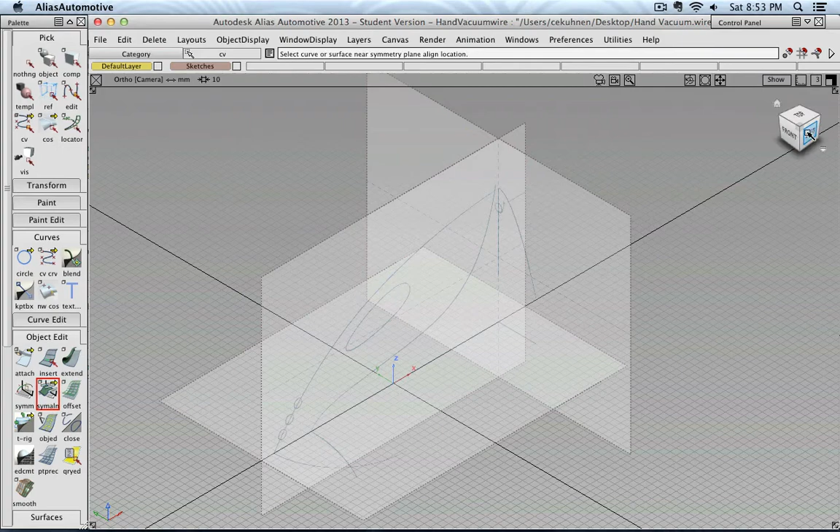So let's get started. What we do first is, for example, in side view, sketch the upper profile curve. So I go to curves, and with my Alt key, I press and create my first point. Make a second one, third, and maybe here I position my last point. Then I can go into the CV mode and into move mode and move it slightly down.

This point, for example, I move with the middle mouse button a little bit to the right. And then those 2 points I reposition freely with my left mouse button. Okay, so that looks quite good.

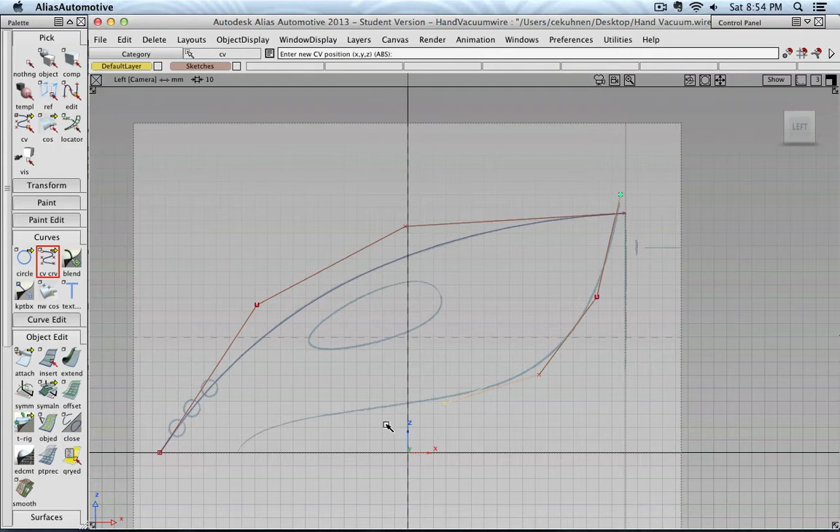Now I can create the inner curve, and I can, for example, maybe start here, and then I have to guess a little bit now how many points I might need to draw this profile curve. And then here to make sure that this point is at the same height as this point, temporarily I'm going to make use of my snapping to the grid with the Alt key, and then I go to the move mode and reposition those points.

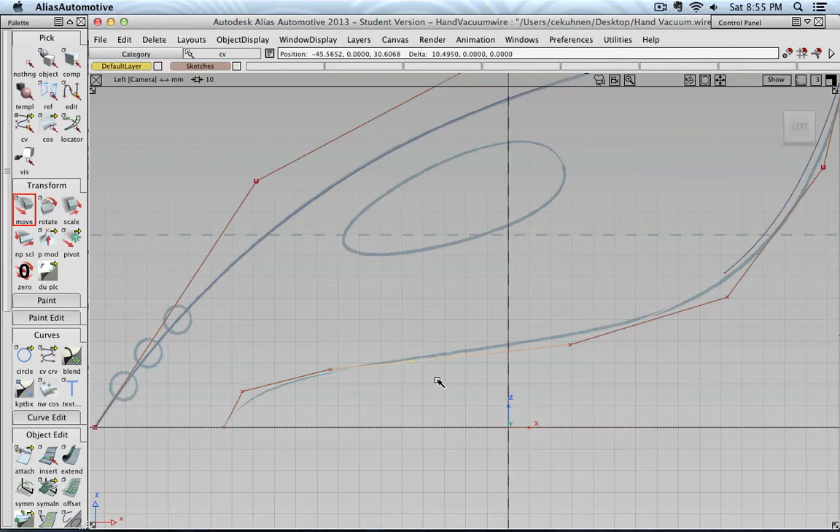And as it looks like, I might have 1 or 2 points maybe too much. Maybe this one I could remove. So I select a point and press the delete key. Then the curve gets simplified a little bit. And that's pretty much what I'm looking for. So a little bit more tweaking. And this also seems to be a good set.

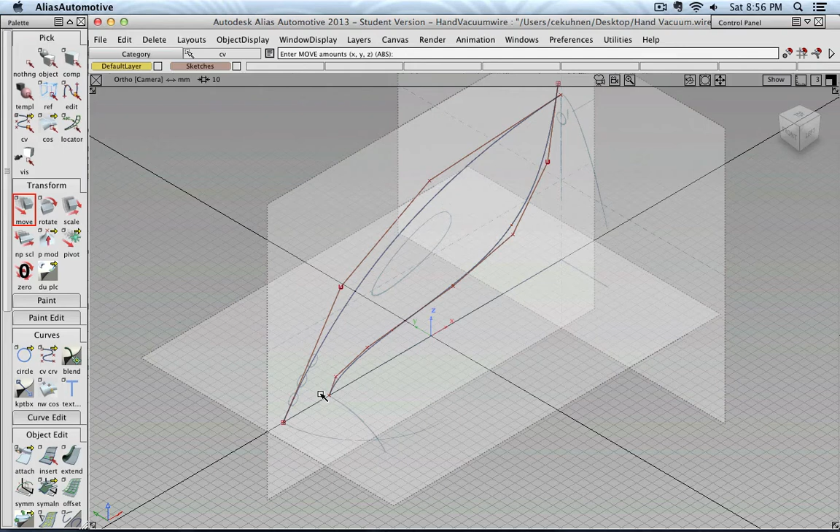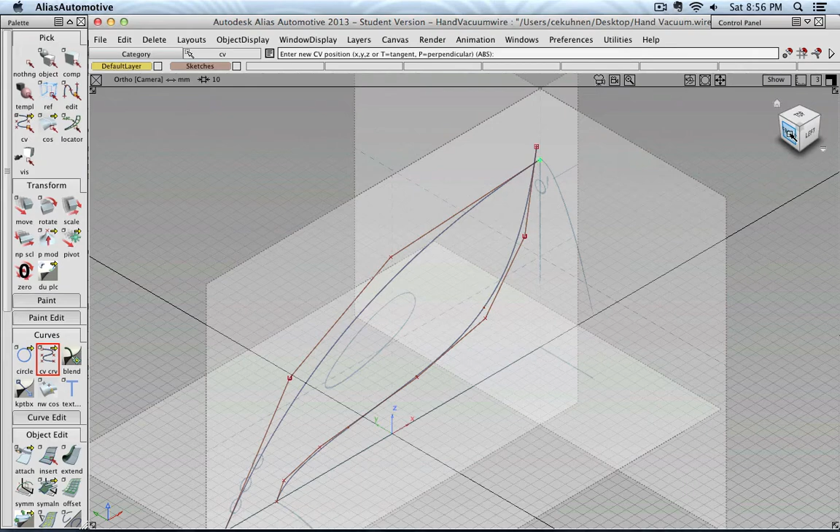Okay, so now it's time to create, for example, this vertical curve and those 2 arcs that are on the horizontal plane. And I can again start with my CV curve. Let's say I start up here. Then I can press the Control key or click on the point snap. Make my first point snap to the end of that curve. Could go into the front view and then press my middle mouse button and drag a point out, and then maybe with 1 or 2 points finish this curve.

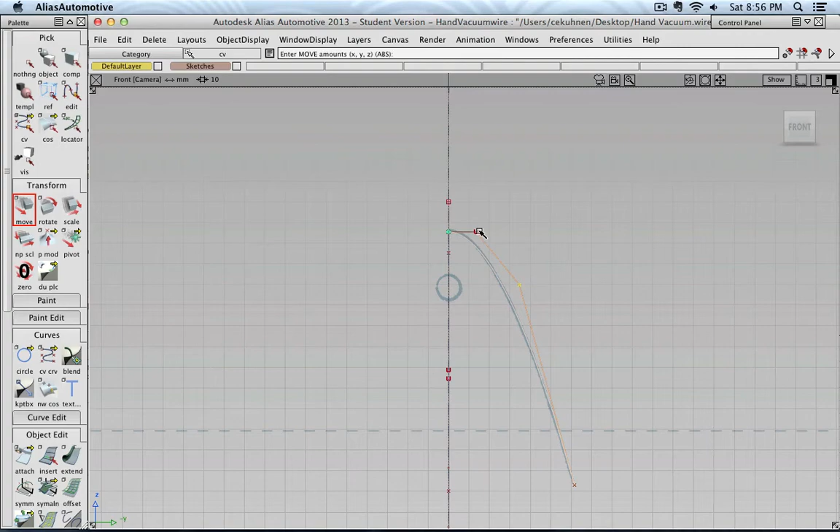I need to do a little bit of adjustment, and middle mouse button here as well, because I would like to make sure that this point and this point will remain perfectly horizontal, so that this curve, when we mirror it over, flows nicely into the left side, so we do not get a kink. So it's again the tangency that's important for the surface curvature.

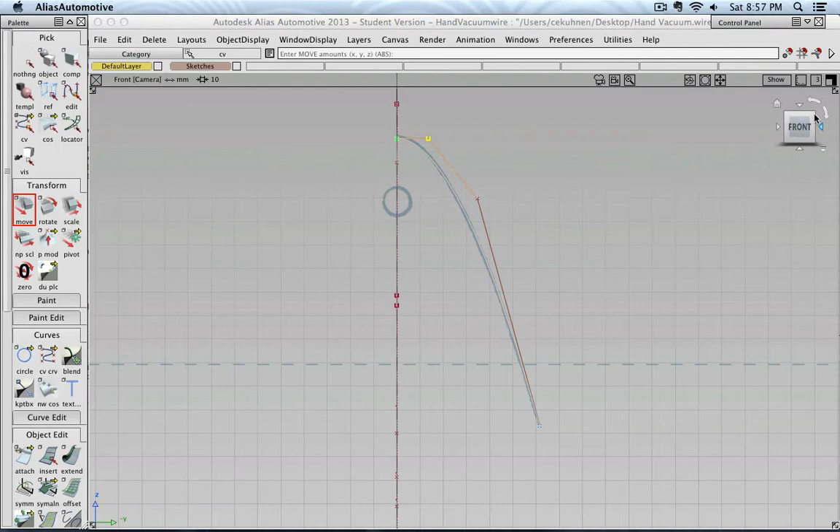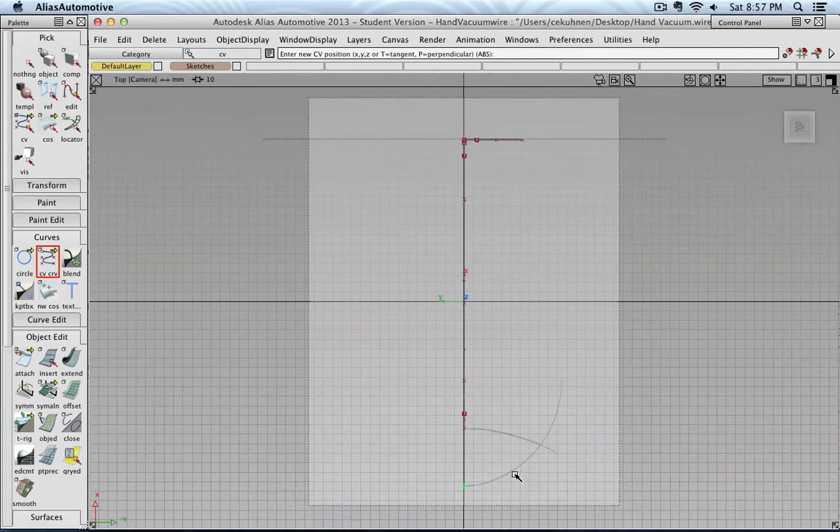Now let's do the same with the 2 curves here, but this time I show you a different approach, and I'm going to place my point here again, pressing the Control key. Then I can go into top view, and I'm just clicking those points first. And before I do anything else, I'm going to use an align tool for the symmetry to make sure that the beginning of this curve to this axis will be symmetrical.

So what does that mean? Let's go into top view so you can see what will happen. Pay attention to where all those points are. If you go to Object Edit and select the symmetry plane align, then it asks you to select a curve or surface near a symmetry plane. So this thicker line, that is basically a symmetry plane. So then I can click close on this curve that is close to the symmetry plane.

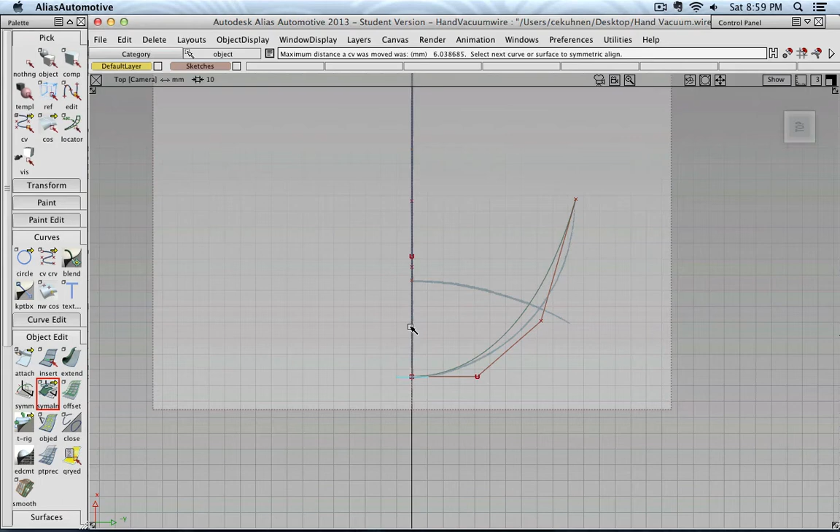When I click, you see that this point was pushed down. Now this point is parallel or tangent basically to this point, and those 2 points are tangent to this construction plane. The nice part is I could, for example, select this point, then I go into move mode and maybe change my curvature a little bit.

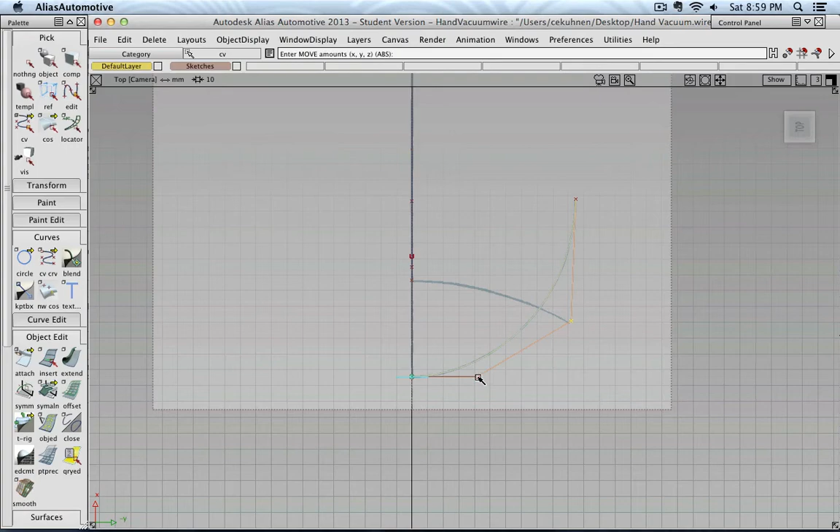And when I select maybe this point, and now I, for example, move it along the x-axis down, you will see that the other point snaps with it. So the align command makes sure that the second point after the first point will always be aligned perpendicular to the construction plane, so that the curve that's created will be perpendicular to the construction plane, and then when it flows into the other curve, the connection will be tangent.

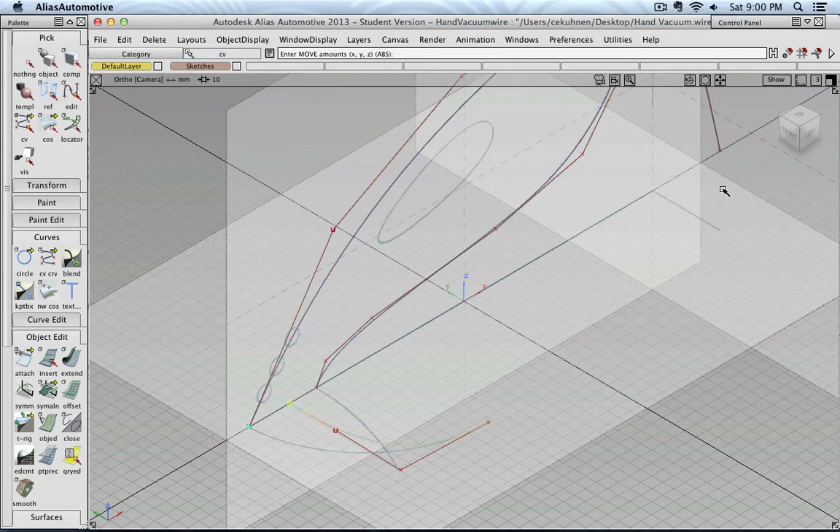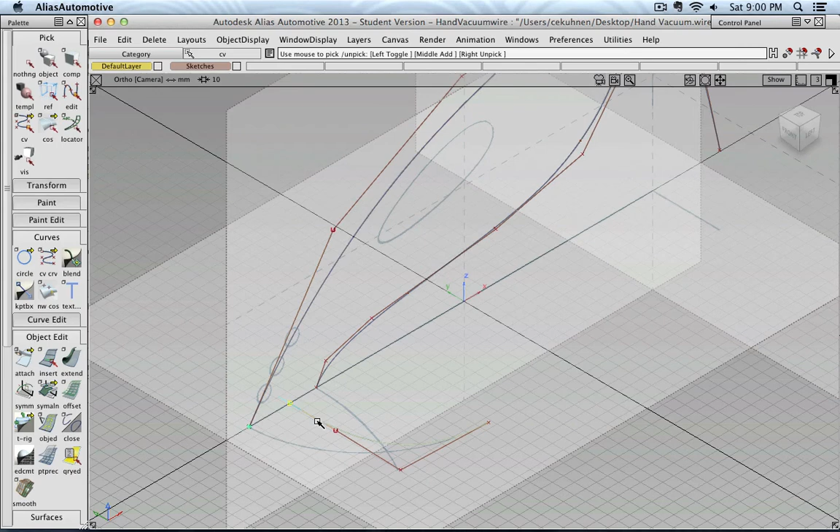Now this curve point I have to push back, so I could press Ctrl, click on this point, or not. Sometimes Alias is a little bit funky there. Let's do this again. Okay, other way. I turn on the snap and then press there. So what's Alias doing right now? Let's turn this off. Okay, now let's press the move command. Oh, that was the wrong one. Okay, and now press Ctrl, and there it snapped. Okay.

So it was important that you go to the move command, and then maybe with the left, right, or middle mouse button you restrict the direction, and then you press the snap key, because otherwise Alias, as you can see, gets a little bit confused.

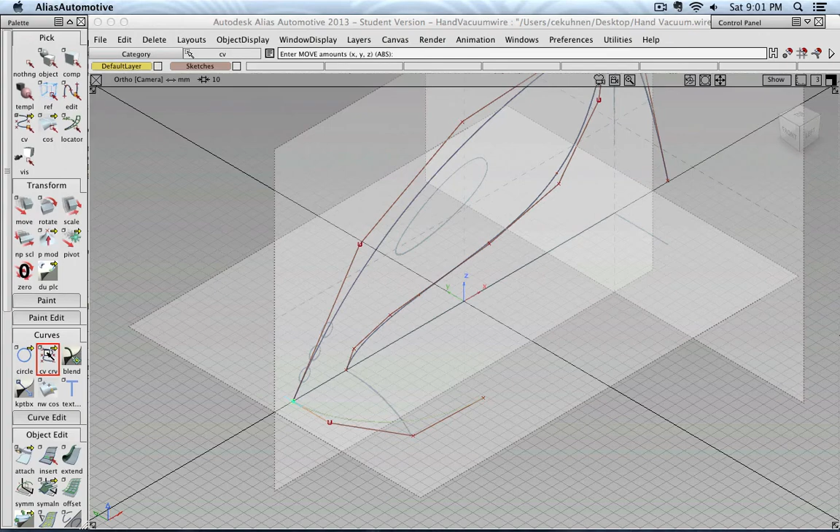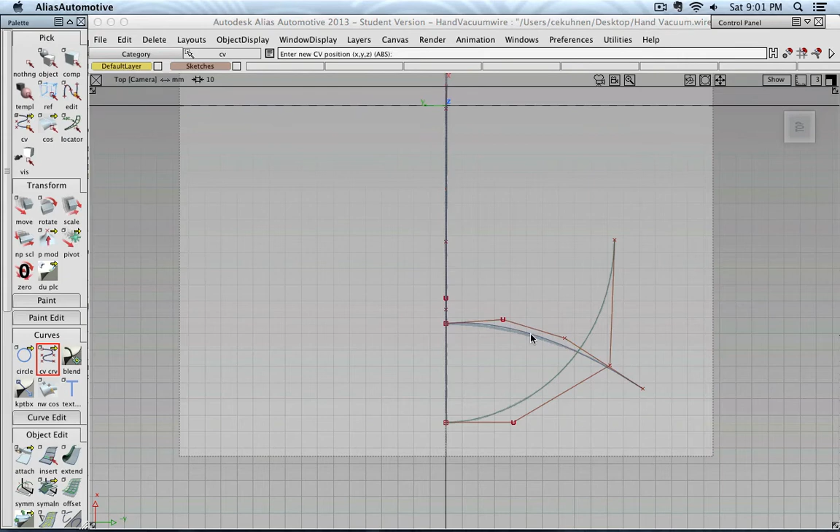So let's do the same also with the other curve. Maybe in top view I go and sketch a curve. No, actually I would like to start here. So I press Ctrl, click, snap my first point to the beginning, and then click 3 times more to create those points. And then I do the same with the symmetry align again for this curve. Click there, and you see this point was pushed down, so that is nice and symmetrical.

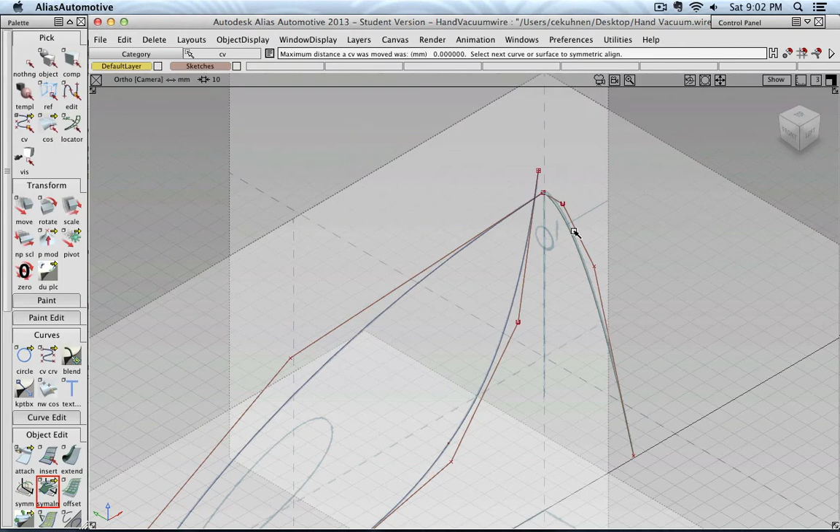And we can also do the same here, just to make sure that not by accident later we might move any point and then change the tangency of the mirrored curve. Because every time when I move one of those 2 points, it will still remain tangent, because we are applying the align tool at the same time. Okay, so that's quite good.

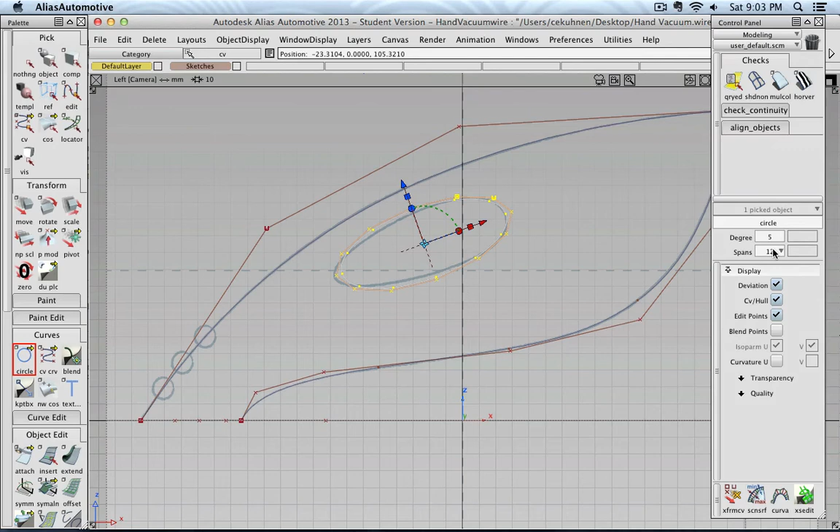Maybe we can create the opening for our handle here. I'm going to rotate this and then maybe scale it down, maybe move it over a little bit. Yeah, something like this. That is good. And I feel like I have way too many spans, so maybe 6 spans. So you see I have less points I need to work with, and I still get the same nice soft curve.

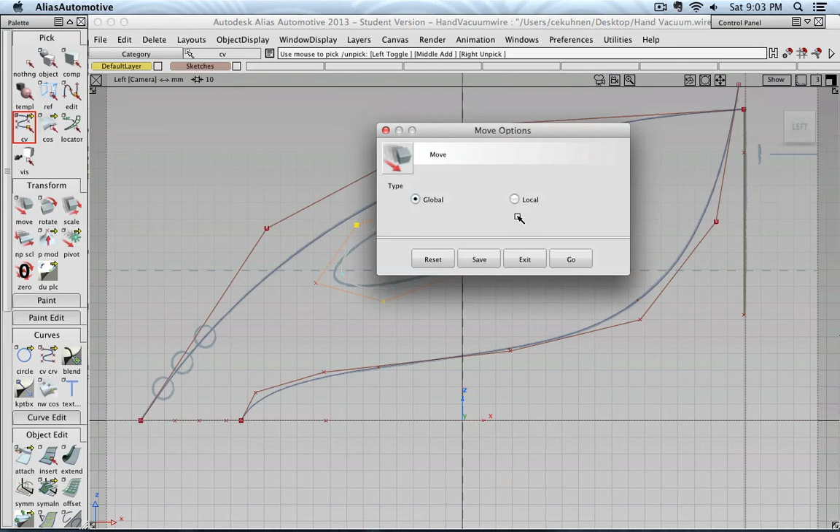And then I could go into the CV editor here and then go into the local move. Actually, I need to go into local scale here. So pressing the right mouse button to scale those points together, and then this point maybe along the x-axis out.

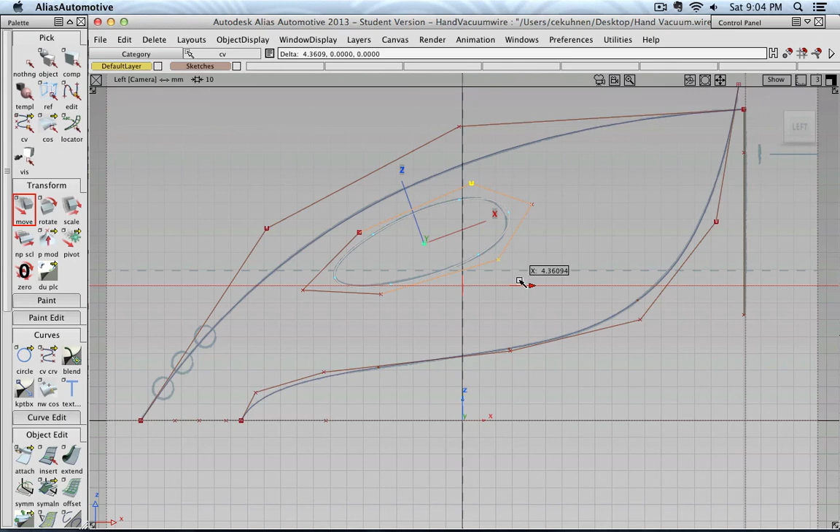Yeah, those 2 points maybe to there, and this one can go back. Okay, that also is pretty good. And now we have created all the necessary profiles.